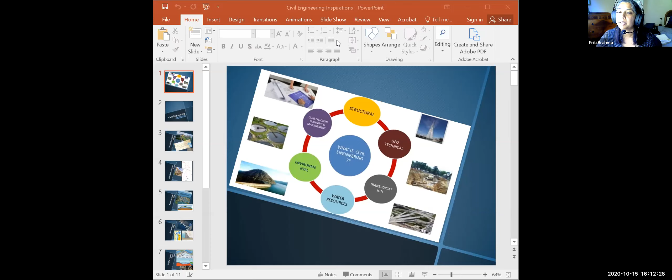I also posted 6 short videos for you to watch that go into individual people working in each of these specialties of civil engineering. I think you can get a lot out of that because some of them are students, some are young professionals, and they can give you more insight into what they do on a day-to-day basis in each of these 6 subdisciplines of civil engineering.

So rather than rehash what civil engineering is, I thought instead we'd look at some great civil engineering projects - some you may be familiar with and some not - and talk a little about some of the things related to these projects.

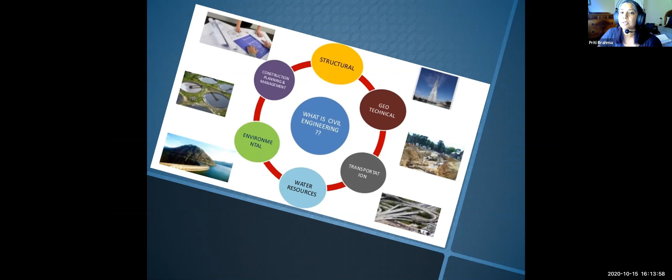We all know civil engineers design, build, and maintain basically the foundation for our modern society - roads, bridges, drinking water, energy systems, seaports and airports, transportation and infrastructure for all these systems, as well as keeping the environment clean. So that's just a brief overview, and please watch the 6 videos - in fact, the follow-up on this is to reflect on the videos, so you will need to watch them.

Civil engineers have the American Society of Civil Engineers - some of you may have come across this in the homework assignments we've done so far. The American Society of Civil Engineers celebrates a lot of creativity and innovation in civil engineering by showcasing projects that have taken place all over the world through their Civil Engineering Landmarks program, and these projects are at least 50 years old.

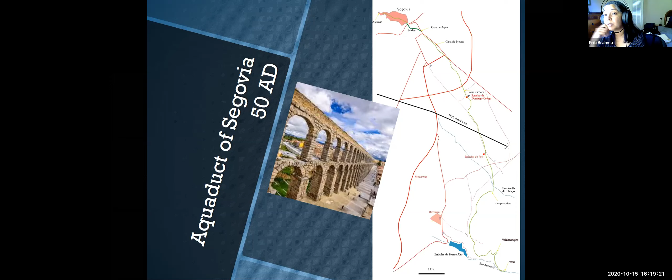There are 167 arches more than 29 feet high, and in many places along it you see the double arch configuration shown here. This was named one of those historic civil engineering landmarks in 1999. The whole idea was it transported water from the river to the city, and believe it or not, it's so well preserved that it's still doing that function today. Pretty amazing.

All right, the Panama Canal. Now we're jumping way ahead, thousands of years, to the Panama Canal in 1914. We're all familiar with this, but do we really know how it works? It's really an amazing system. It's 47 miles long, the width of that isthmus in Central America, and it connects the Atlantic and Pacific Oceans. It reduced what was a trip around Cape Horn by 9,000 miles, going all the way around South America. More than 15,000 ships go through here every year.

What else can I tell you? It needed more than 60 million pounds of dynamite and 40,000 workers to dig and build it, and they moved enough dirt to bury all of Manhattan 12 feet deep.

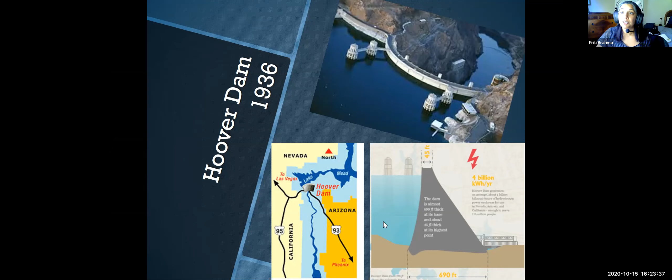In the times of COVID it's probably not happening, but in normal days you can actually tour this site. I think the tour is free, or it costs like $2 or $5. If you're in the area, it would be really great to visit, especially if you're interested in civil engineering or any type of energy engineering, hydropower, anything like that.

This one was made more recently, in 1994. I was just trying to do some math to see if most of you were alive when this was built. I was, so I remember it, but I don't know if it's in your early years if you recall hearing about the English Channel Tunnel, also called the Chunnel, which was made in 1994.

It is a tunnel that runs under the English Channel, and it happens to be 31 miles long and up to 250 feet deep. It connects England and France. It's actually the second longest tunnel in the world and contains the longest undersea portion of any tunnel in the world.

What's interesting about it is high-speed trains run through it like you see here, and these high-speed trains move so fast that there are valves in the tunnel walls that open and close to vent the pressure that builds up as the trains push through the tunnel.

It actually took 6 years and 13,000 engineers, construction workers, and technicians, and 11 boring machines to build. I've got a photo right here of a boring machine as it's making the tunnel. This is what the inside of the tunnel looks like today, and this is kind of how it runs under the seabed.

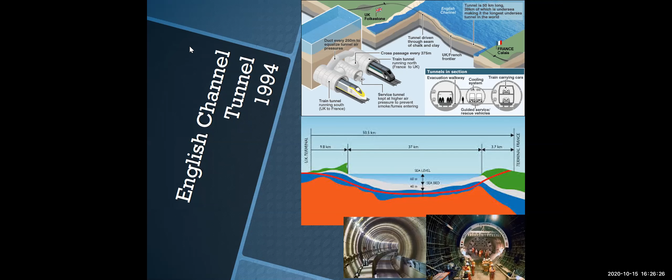Weren't we supposed to have high-speed trains here in California at one point? The ones they were talking about for California were above ground. But yes, there was a lot of talk of a high-speed train between San Francisco and Los Angeles, and there's been a lot of talk of a high-speed train also on the East Coast between Washington, D.C. and New York. I don't know right now. Does anyone know about the status of either of those?

Yeah, I haven't heard about it recently, but those are both great civil engineering projects that are in the future, and they're not the only ones. There are high-speed trains being developed all over the world. I think Japan has already got one, China might be putting one in, and I know there's the TGV in France that runs north to south. So lots of opportunities to work on a project like that after you graduate with a civil engineering degree in the next several years.

Okay, let's see, I only have a few more slides.

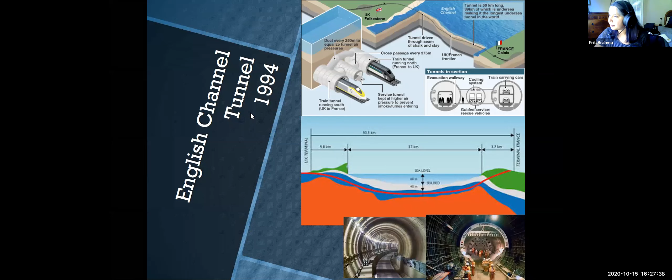All right, so I think I mentioned this tower before. This is the Burj Khalifa Tower in the United Arab Emirates. When we first talked about civil engineering, I don't think I talked about a lot of the specifics of it, other than it happens to be the world's tallest skyscraper, at a height of 2,717 feet - almost a full 1,000 feet higher than the One World Trade Center in New York.

Just to give you an idea, down here I show some comparisons of other really tall buildings you may be familiar with, so you can see how tall this really is. Anyone know how many floors there are in 2,717 feet? Any guesses?

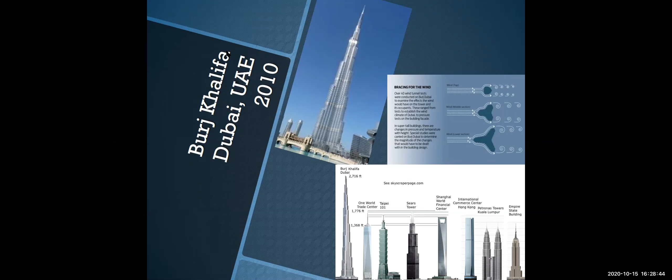One of the books I have with me right now is a Guinness Book of World Records that actually has this in it, and I think it's 163. It is, you're right - it is 163 floors.

Can you imagine riding that elevator? It's probably not one elevator that goes all the way to the top. In fact, I think I've been in the Empire State Building, and it was more than one elevator bank that you take - you take different ones to get to the top. But it's kind of scary to think that you're standing up there. There's 27 terraces on this building, so you can make your way outside and take a look down. It is the tallest freestanding structure in the world.

Now, what's most interesting about it is the way it was tested for withstanding the winds. Strong winds are actually a big problem in this area of the world, so they had to do 40 wind tunnel tests to determine the wind's impact on the building and also on the construction cranes that would build the building. They built it so it can withstand winds of up to 99 miles an hour.

So this is a problem with all super tall buildings, but they had to do 40 tests to get it right. It took 22 million hours to build, and some of it was done at night to avoid the high temperatures during the day. So really an amazing building.

Has anyone been here? Not me. Yeah, not me either. Interesting. Okay, cool.

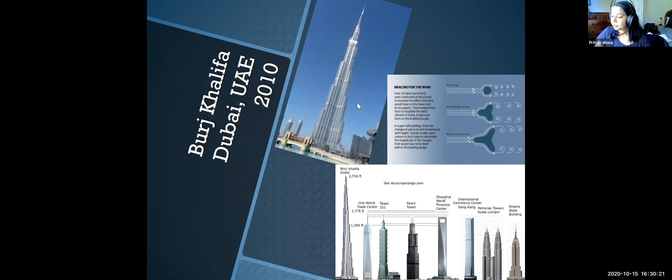We do have a lot of field trips to do after COVID, and wouldn't it be great if we did a whirlwind world tour of all of these sites and all the other ones? That would be so amazing.

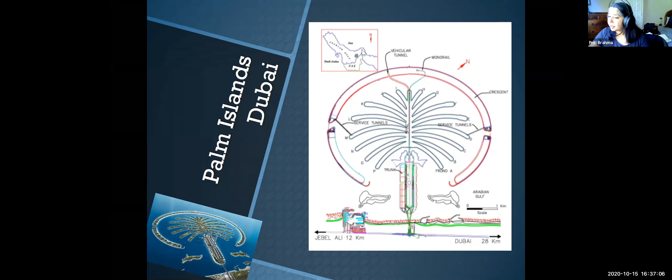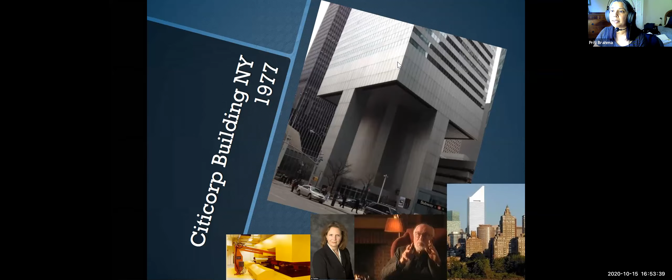Cool, well, hello everyone. So I went to Cabrillo, and at my time there I just dove into whatever I could get involved with, really trying to get some engineering experience, have college experiences, and more importantly, to network. Where I've gotten to now has been mainly because of my networking and being able to connect with different people. I transferred to San Jose State, and while there I was part of their engineering abroad program as well, so I did that.

Career-wise, while at Cabrillo I was working at the Monterey One wastewater treatment plant in Marina. When I transferred to San Jose State, I was working for the County of Santa Cruz in Public Works under road design. I also had second jobs to make ends meet. And now I'm in Davis, just living my life.

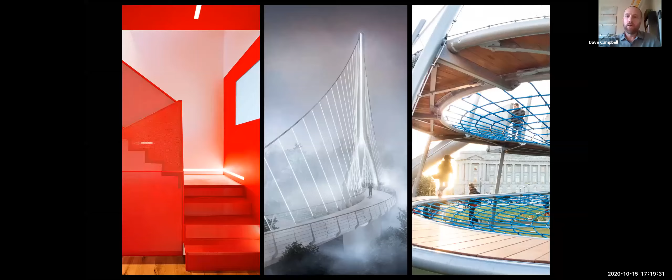As Priti mentioned, I took a very circuitous path to where I'm at now. I started as an art student, did engineering at Cabrillo, ended up transferring to Cal Poly, and then worked as a structural designer and also in structural forensics for a couple of years. Then I went back and did my graduate degree in architecture. Now I'm a project manager at a firm that does integrated structures and architecture. We don't just do both separately - we take on projects where we can express both elements simultaneously. So for the next couple of minutes I'll try to explain what that means, how you can merge these things, in the context of some of the work I've done.

So to begin, if I can get my PowerPoint back - let's see, there we go.

This may not look like the masterwork of architecture here, but how many of you guys have eaten pizza? And the question is, how do we eat pizza? Some of you have eaten pizza, that's great. You don't just grab it at the back of the crust and let it droop down your hand - you fold it, like a little bit of a taco, especially if it's thin, New York style pizza. You're actually using a structural principle there - a principle of virtual work, or virtual depth rather. So the pizza is acting as if it's really thick at the back end, where we folded it a little bit. We use the same properties for paper airplanes. The idea is that through geometry, rather than strength of materials, we can establish interesting form and behavior.

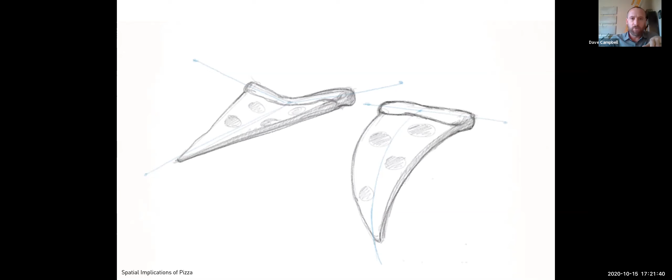So we applied this directly in this house that I did with Fougeron Architecture in San Francisco, applying it to this stair. If you're familiar with San Francisco Victorians, they're really narrow and really deep - long, deep, tall houses. Our main goal was to bring a lot of light and air into the space, but we still needed a staircase, which takes up a lot of room. So the goal was to use folded plates - the same principle as folding pizza or a paper airplane - to use perforated steel, about 1/8 inch perforated steel, which is really, really weak. But by folding it, we gain a lot of structural stiffness.

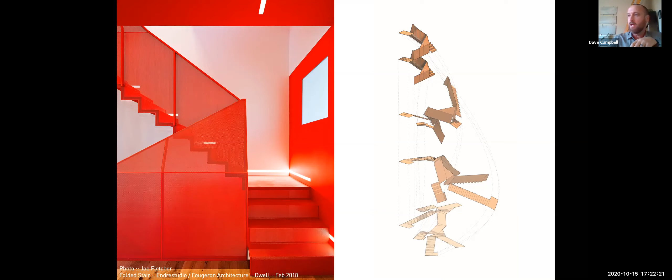And we create not only a space that's expressive, but also that allows light to penetrate deep into the house. So this idea of integrating a basic structural principle into a spatial quality is something that's really fundamental to my work.

This is a bridge we have in Ohio that just opened right before everything got shut down for COVID, just in March. We were just about to fly out there for our grand opening of this bridge, and everything got shut down. So I actually haven't seen this finished yet, which is too bad.

But what that does is create thrust, sort of like a roof of a house—it wants to push the walls out. So what we did was we actually tied the bridge deck. We tied the tower back together with the bridge deck, so we resolved the thrust internally.

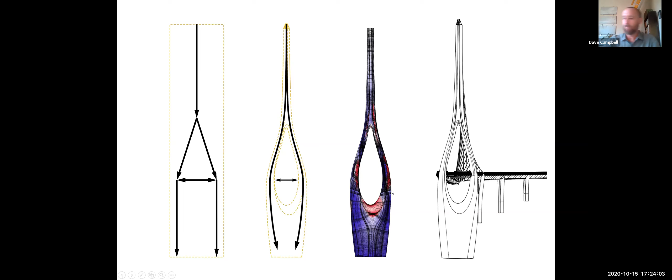With these projects, we have a really heavy use of digital design, a lot of integration between modeling and engineering, modeling and architecture. The reason this is so important is, as you're thinking about how you proceed in your careers or education, what kind of tools do you need in that toolkit? To be a successful engineer, you don't necessarily have to be able to do sophisticated 3D modeling, but it certainly helps—it opens up a whole other avenue of form that you can experiment with.

So for my practice, we integrate really heavily with our digital models. We have a very complete 3-dimensional model. The diagram here on the right shows how that model is built up.

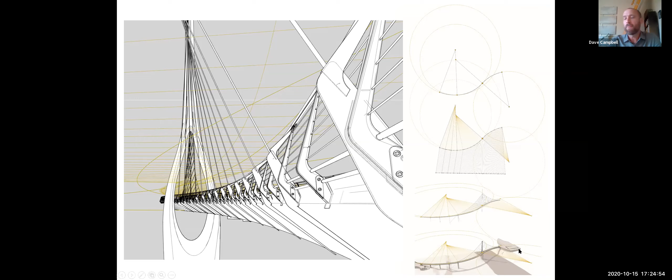That model is integrated directly with our structural analysis software, so that way we can visualize the architecture 3-dimensionally before we build it, which helps us raise the money we need in order to actually build these things. We can use that same model to also do the structural analysis to figure out construction details and so on.

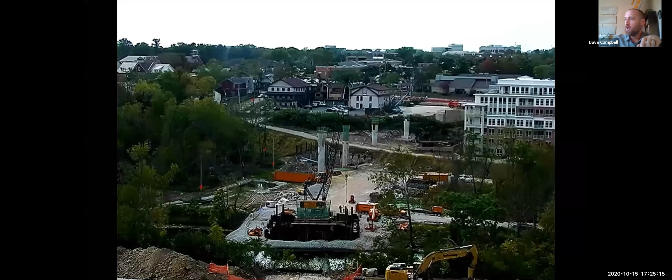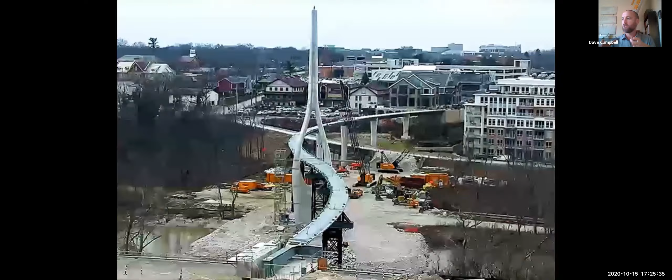So this is a time lapse of the construction of the bridge. One of the things I really loved about this project is the tower itself is a very complicated form. What they used was actually these press molds that they use for highway bridges, but instead of just using the standard AASHTO shapes, they actually milled CNC blocks within there. So they were able to get very close to our original design intent of this very complicated structure.

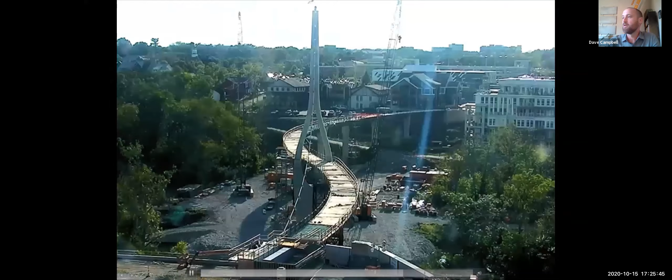Here you can see they've got the cables all in place and wrapped it up. The total construction time ended up being close to 3 years—it should have been about 2.

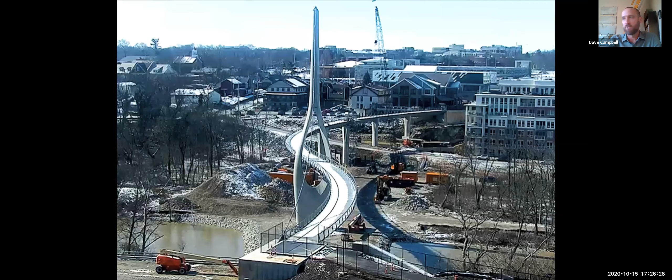But the lead time for the cables—this is probably not super relevant for this class—the cables are a specialized thing, and just because of construction scheduling, we had the site essentially laid down for 8 or 9 months. That's another thing that's really important when you're designing: to think through what's the critical path, what are the things that have to go in place and in sequence in order to get something done on time, because it's very expensive to shut a site down for several months with nothing happening.

And then there's the completed bridge, open for people to go out and be responsible, but still get out into some public space. One of the things that's kind of fun about this project is it's become a place where people do wedding proposals—on Instagram we see a lot of photos of people doing their photos for their engagements, which is pretty fun.

It's in Ohio is the question, but I have a question for you.

So were you also involved in the process to put the bid for this together? How did that part of this process happen, where a firm in Emeryville is building something in Ohio?

Yeah, so we also have an office in Chicago, and that's part of it, that we have sort of a national presence. The other piece is that we have a reputation for this type of design, so we get brought in, or we do a lot of competitions. This is actually a competition we won, and then went all the way through the design process. But since we're pretty small, when it comes to the actual delivery of the project, we almost always bring in another partner, either a local firm, or a firm that has a local office.

So in this case, T.Y. Lin was the company, which is a huge international firm, and they're what's called the engineer of record. We're the design engineer and the architect of record. They're the engineer of record, so they take responsibility for the final structural engineering, and for walking the site and making sure the rebar is being placed properly and everything else.

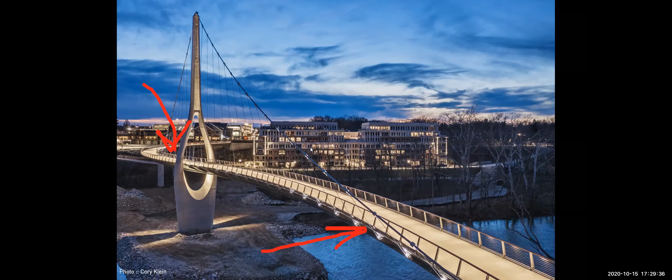I'm just curious how it works, like how there's the cantilever support on this side, but not this side. Yeah, so the other side it's opposite. It's really cool. Is it due to the curvature? But how does that work?

Yeah, so this is a great question, Clayton. I think that was Clayton drawing, maybe, is what it was said. Yeah, so...

Basically this is a very unique structure. This is the only reverse S single suspension bridge in the world. What ends up happening is it looks like it's cantilevered out on the back end, but it's not. It is connected, but it's a slip connection, so it's able to move freely. So that curvature, without getting too deep into the technical aspects, is balanced by the single-sided supported cables. Basically the bridge is curved, it wants to sort of tip down toward the river. Let me pull up my drawing tools here so I can not just gesture at you.

So the curved bridge wants to tip, and this one wants to tip the opposite direction. Oh, so it's balanced. Yeah, and the cables also change their angle depending on where they're at. What they do is hit these little plates, which push them right through the virtual shear center of the section, which means that as this thing wants to twist, it's basically being supported through its virtual centroid. We do that through the bridge cross section, deck cross section, this box girder that's down below.

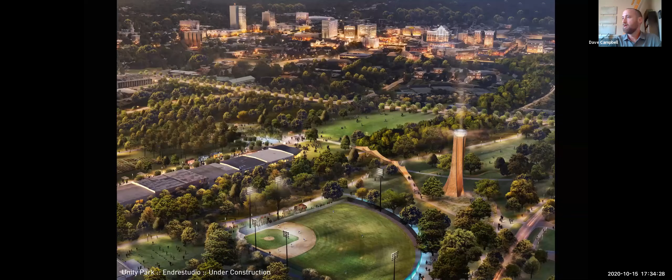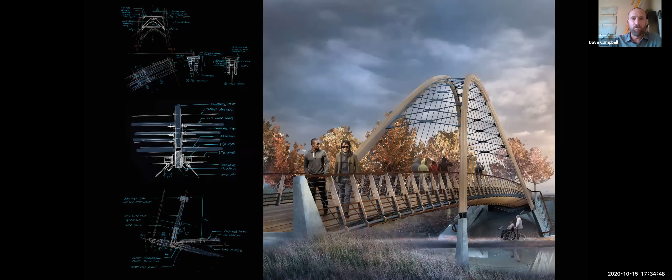What's nice about being able to hand draw is you can not only work out your structural system, doing your calculations of how big the plate needs to be at a given spot, how you're transferring forces across a particular node, but also what is the sort of presence of that detail—how's it going to feel, what is it going to look like while you're there.

When you're doing engineering, to be an engineer that everyone wants to work with, engaging in the process is so important—not just treating it like it's a problem to be solved and then you're done, but rather being committed to whatever the vision is for that particular project.

Priti, who you'll hear from in just a second, just put a little bee in my ear. The other thing worth knowing is there are a couple of programs in the country that are architectural engineering programs. The first one is at Cal Poly, and it's an excellent program—it's housed within the College of Architecture rather than the College of Engineering. If I had known more about it before I went down to Cal Poly, I probably would have gone that direction, because you get more structural engineering experience, and you also get some architecture studios to understand how buildings are being designed, and how you as an engineer will integrate that process.

The trade-off is you have fewer classes like water resources, environmental engineering, and transportation engineering—all the other things that make up a civil engineering degree. You're taking those classes and doing additional structures classes and classes in architecture. If you're interested in this type of thing, I highly recommend checking out architectural engineering. Kansas State also has a really good architectural engineering program, and there are a handful of others throughout the country.

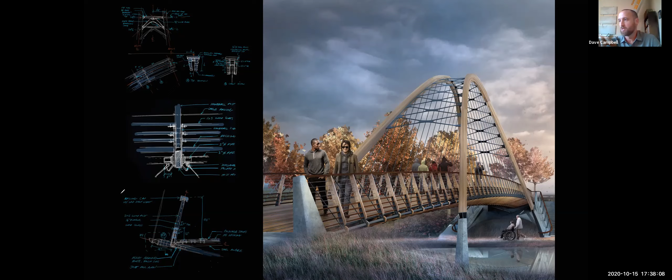We use Rhino really heavily, and we'll interface with Revit with our designer of record, architect or engineer of record. Then from there we'll use a couple of different rendering engines. This one was done in V-Ray, and then a whole lot of Photoshop on top of this. So this is where the art comes back in, being able to integrate entourage, the people walking across here, and the trees, to get a particular mood for that image.

The hand sketching stuff, I do in notebooks. I've got like four open on my desk right now. I also do a lot of work on my iPad, which lets me send sketches to my drafting team and other engineers within the company very quickly, because I don't have to scan it or take a photo and email it, I can just send the digital copy. So the iPad is really good for that.

And then in terms of analysis, we use a couple of different tools. There's a tool, a very industry standard tool, called RISA, which is great for structural analysis for buildings, but it doesn't handle complex form particularly well. So we also use a program called Karamba, which integrates directly with Rhino. Let me flip over to another project real quick.

And did you learn those programs on the job or through your schoolwork?

Yeah, so Rhino I learned in grad school. This image is taken from the finite element modeler, which is Karamba that I referenced. I learned this a little bit in grad school, and then really figured out how to use it professionally on the job. This became more directly part of my workflow with Ender Studio.

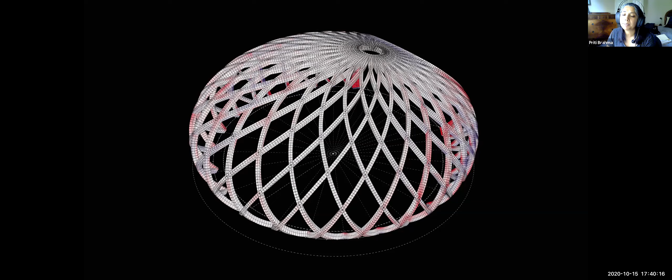Wow, so those are skills you're looking for particularly. Absolutely. And someone was asking if there are classes on those programs, and another person was asking if there are apps they can buy. Maybe if you have a link to some of them you could put in the chat, that might be interesting. Yeah, let me jot it down real quick, and then I'll throw some comments in the chat as well.

Yeah, so the classes, definitely you can take classes. These days, if you want to learn how to do anything, YouTube is really your best friend. You don't need to take a class in CAD or in a modeler. There are things you get by going through an AutoCAD class, a Revit class, or a Rhino class, but in many cases you can pick these things up as you go. Most of you in this class are probably pretty digitally savvy, even if you don't think of yourselves that way, you can pick up software really quickly. So if you didn't have any modeling experience, that wouldn't necessarily be a deal breaker, we would just have to consider how you can integrate immediately.

It's something worth paying attention to, even in engineering: not only understanding how you do analysis and work with analysis programs, but also how you just model. How do you make complex geometry? It can become very important.

This image shows stress areas in red. This is a house I'm doing down in Big Sur. I'm closing with this one because it's an integration, and our role is all the way through the project, from inception to the end of construction, and it's all digitally integrated. This is the plugin Karamba, a finite element modeler, which shows stress. You're seeing tension and compression in these individual units for this very complicated urchin-shaped house.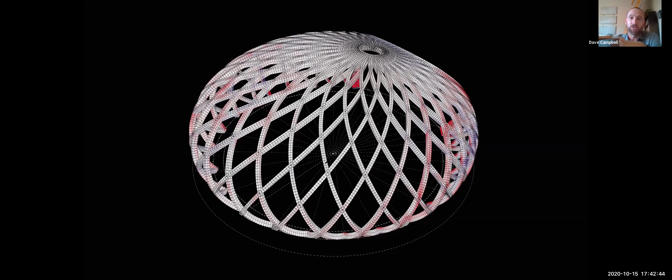The challenge is that the model itself is not where you can end. This is where your engineering coursework about codes comes in. If you get into civil or structural engineering, you start learning about concrete and steel and how it's actually codified, which is a bit different than how you analyze something. Then you get into things like interaction diagrams, which tell us what a given reinforced concrete section will take, because a reinforced concrete section is both concrete and steel.

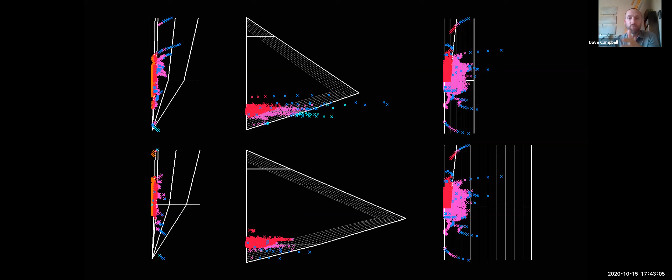We move from that, and this gets pretty computationally heavy, so coding classes are also useful for engineers. It's good to understand at least the basics of how scripts and code are written. We take that stress information and literally translate it into a heat map of whether a given reinforced section is overstressed or not.

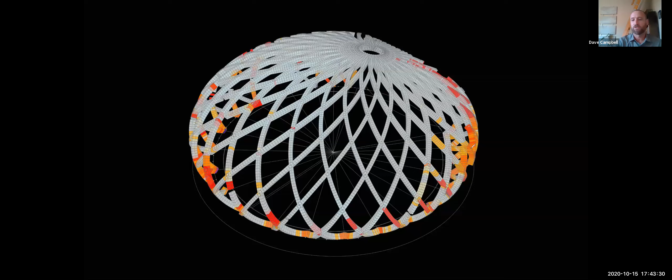That moves into a smoothed version, through an optimization process where we're smoothing this into a very limited number of concrete sections, because we don't want 30 different types for the contractors to deal with. I'll just blow through these quickly.

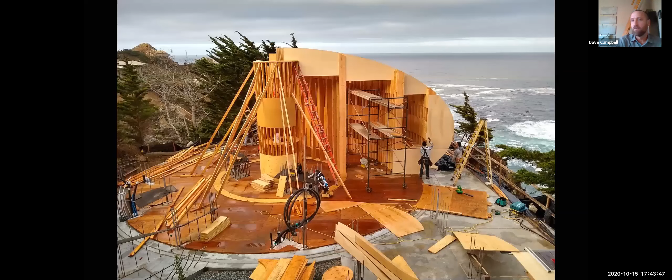The interesting thing is that it's a concrete building, so we have to have formwork, and that formwork is also too complicated to just hand somebody a set of plans and say build this. Every part's geometry is unique and super complex. With a reinforced concrete project, the joke is you have to build the building three times: once out of wood for the formwork, once out of steel for the reinforcing, and then the third time in concrete itself.

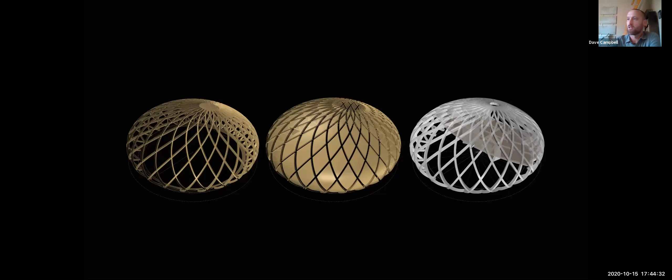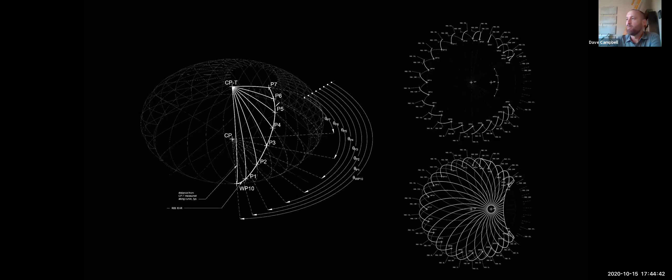Here the interior formwork of the dome is going up. This is the digital system of every piece of the mold we're designing, so we're heavily integrated all the way through the construction process. Every part is labeled and CNC milled, then shipped to site, and we give them information on how to place those individual elements. Here we've got the interior formwork of the dome, and then our reinforcing steel.

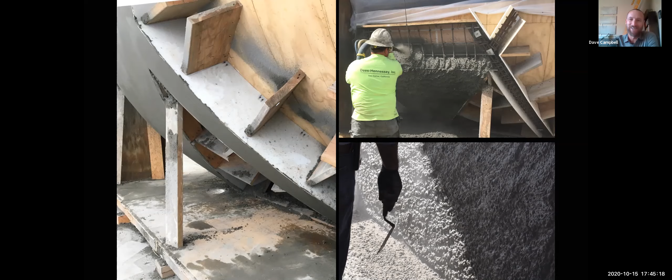This is maybe just interesting, I'll throw this in quickly at the end. This is a prototype of that wall section. When you do something really complicated, building departments often say we have no way of assessing this, so go ahead, but you have to prove to us through a physical mock-up that this will actually work. So this is us testing the construction methodology to see if we can actually build it. This is what it looked like a few months ago.

So who wants to live in a sea urchin? Who is this person?

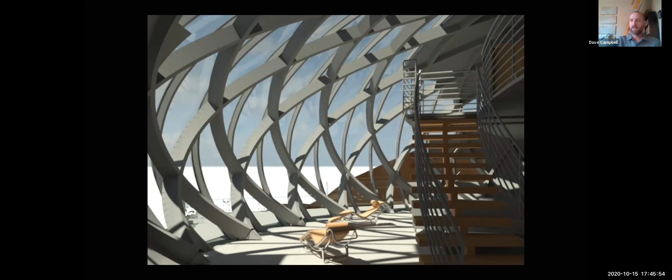And those are all windows, right? On the outside, yeah, everything is open on that side. The geometry is shifted so the openings are big on one side and small on the other, so we have the maximum views from this side. And the site is just spectacular, it's a remarkable place. But yeah, the client, she's a character.

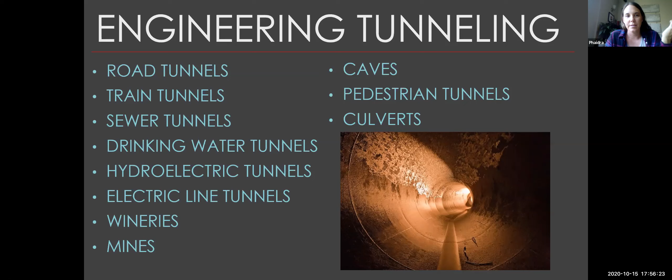The machinery and technology has gotten so good that there's so much that we would never know in a lot of ways. There were some projects, I think it was in LA, where they were trying to put subways in and then the ground was sinking and stuff. It doesn't always go so smoothly, right?

No, it doesn't. Are you talking about the Purple Line in LA Metro? Yeah. So the big thing about tunnels is it's solely dependent on the soils, right? How you're excavating and the soils that you're in.

For instance, like this photo on the bottom right, you see this really large water cavern. This is in Chile, and that's rock. Rock is really sound and really stout, so the big buildings above it can withstand some of that stress because the ground's not moving underneath you.

And soft ground is the worst. So soft ground and water is the worst for tunnels, it's horrible. And LA has a problem with the tar pits, the tar sands.

I'm actually working on the LA Purple Line project. I wish I had a photo, but you can't take a camera down there because it has so much sulfur in it from the tar sands that it could explode.

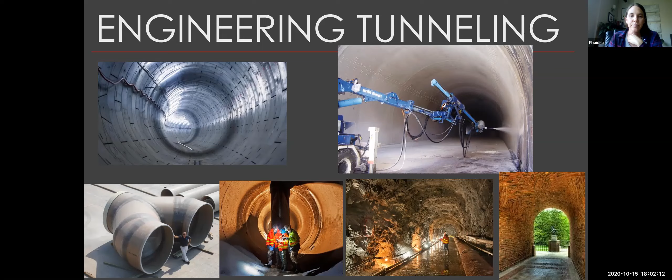So just going over three quick ways of excavating a hole in the ground. One of them is blasting, and it's one of my favorites because it's so unique and different, and you don't get to hold dynamite very many times in your life. You have to make sure you're doing it safely.

I think the question students might have here is, do you get to do this hands-on yourself? I have many times, especially early in my career, I've been doing this for about 15 years now. Early on, I was allowed to fill the holes and actually set off charges, multiple charges. I think it depends on who you work for. If you work for a contractor as an engineer, you'd be able to design and fill the holes and set off charges, but as an engineer for the owner, you really wouldn't be allowed to. I knew someone working here though, so they let me do it.

There's really nothing like setting off a charge. I have a couple of videos I wanted to show. It's pretty exhilarating. This is just like a trim shot.

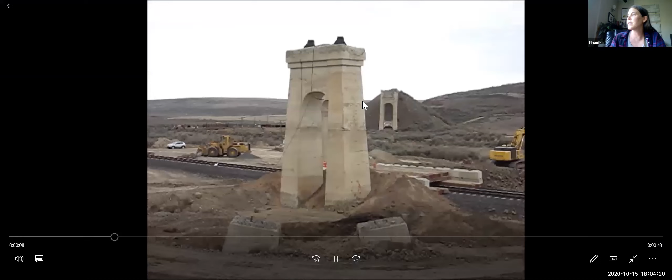It doesn't seem like a lot, right? That seems like just a trim shot, real small. But the reason it goes off at different times is because in blasting you want to give a free face to the blast. This is actually not in a tunnel, but we did a lot of blasting. This is a bridge pier along a railroad track, and there was a tunnel further down, so we couldn't interrupt train service. When we had to get rid of this bridge pier, it had to fall on the opposite side of the tracks. So you design the blast so that, in slow motion, the bridge pier falls in the opposite direction of the tracks. It's hard to get videos of blasting in a tunnel because you're not supposed to be close to it, but in this scenario it's much easier to get blasting videos when you're outside. That is so cool. It is pretty fun, I'm not gonna lie, it's really a blast.

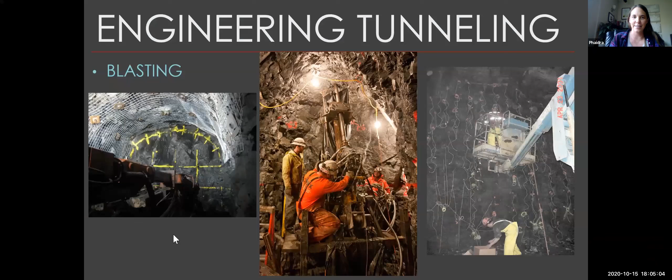Okay, the other one is a roadheader. You know that movie Total Recall? This is very Total Recall-ish, very futuristic, but it's very effective. Some of the issues with this is you can only do it in certain ground types. It can be very messy, really dusty, so a lot of them put a water spigot on the edge to spray down whatever you're excavating. But usually this is good in soft rock conditions. This is also really common in wineries because the machines are a lot cheaper than a tunnel boring machine, and a lot of places won't let you blast within city limits, even though blasting can be controlled. So using something like this would be good.

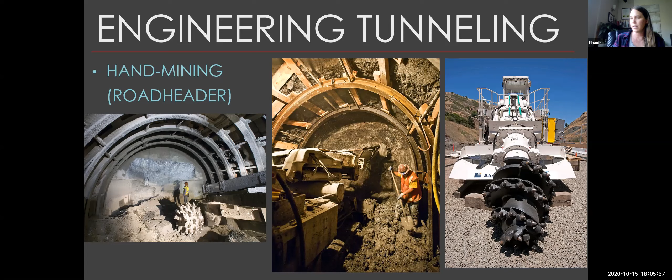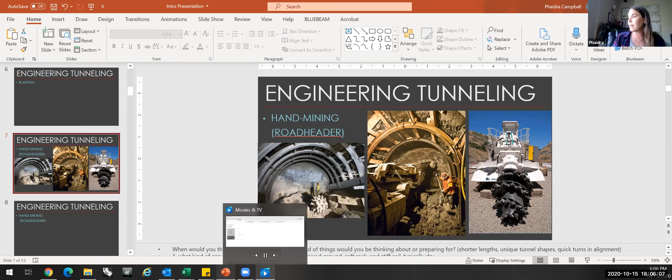I have a video of it. Does one take longer than the other? I mean, this looks small, so it'd take a long time. Well, it does take a little bit longer, but not very, it depends on the ground entirely, and how fast you are at putting up ground support behind it. So it's pretty dirty and loud, pretty messy.

You have to be able to withstand some of that, so it's not always the best way of excavating. But this is kind of the cream of the crop, one of the most common things you'll see on the news, especially now with companies like the Boring Company who have a lot of marketing techniques.

These are tunnel boring machines. This is where mechanical engineering and electrical engineering really shine, and it definitely incorporates a lot of different types of engineering. One company I'll put in the chat is called Herrenknecht, a German company. There are about 3 different tunnel boring machine companies in Germany, 1 in France, 2 in China, 2 in Japan, and 1 in the United States, plus maybe a couple more sprinkled around, but those are the main ones.

Herrenknecht, I think, has the best videos on their website. Basically what it does is it almost acts like a worm, I guess you could say, with a spindle on a head. The head rotates, and there are disc cutters on the end of the head that score the ground in front of it. As it scores, the ground falls to the bottom and is brought up through a screw conveyor, kind of like a Da Vinci design. Didn't Da Vinci design a screw conveyor?

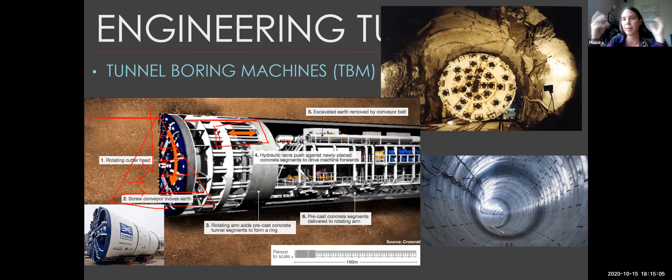Right now it's actually risk with COVID, because people are working in close proximity to one another, and we've had some pretty horrible COVID issues on our sites, especially in LA. And then also working in these tight spaces with the city's structures up above you—there's a lot of risks. And then you always get the lawsuit. There's always a lawsuit with someone saying their doors don't close anymore, and a lot of times we're not even tunneling near their house. Communities hear about things, and it's very litigious. That's what makes this industry so expensive.

Wow. I don't think it's going to get much cheaper. There are new technologies coming out that will help, but at this point I think things are going to just be more expensive.

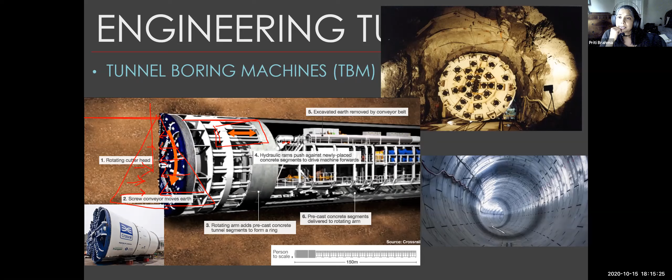So I'm just going to go through, I don't have a lot of time left. Oh, I don't have any time left. Can I go through just one quick project?

Yeah, sure. Okay, so I just wanted to talk about this, this industry is really diverse for what kind of engineering you want to go into.

What makes it really fun is there's never a tunnel where you live, very rarely, so you do have to travel. One of my coworkers who just got into the tunneling industry about 2 years ago was really confused by this - he said, I don't understand, I'm moving here, I'm moving there. And I was like, well, we go where the tunnel project is. The tunnel project never comes to us.

So if you're interested in travel, in seeing new places, this might be an industry you'd be interested in, because there's always a project in the middle of nowhere that needs a tunnel. And although Kaneohe in Oahu is not in the middle of nowhere, it's in this really amazing place in Hawaii. I got to spend quite a bit of time there doing both the design and the construction.

This is a water sewer tunnel that used a tunnel boring machine, done in rock and soil, mostly basalt, and it had this really beautiful bluish-green basalt and then coralline deposits - you could see coral layers. Geologically, it's fantastic. The length is about 4 miles.

It's a pretty small tunnel at 15 foot. It doesn't seem that small, but it actually is - when you get into those spaces, it's very small. It was round, up to 800 feet of rock above you, and it had 3 shafts.

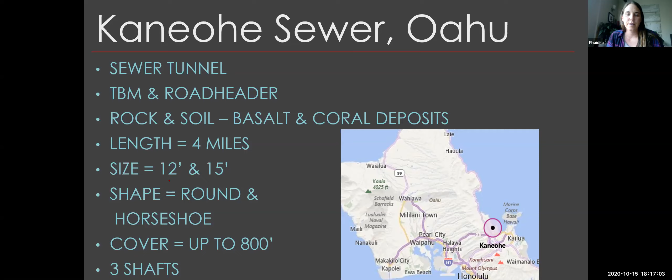So when I was talking about design, like Dave was talking about that planning - there's so much planning involved in this. There's drilling, there's rock cores that you're going to get. When you just drive around, you look at the hillsides and rock faces, and you can get so much information just by driving by and seeing a cut slope, because the joint patterns you see from the surface are going to be the same joint patterns down below.

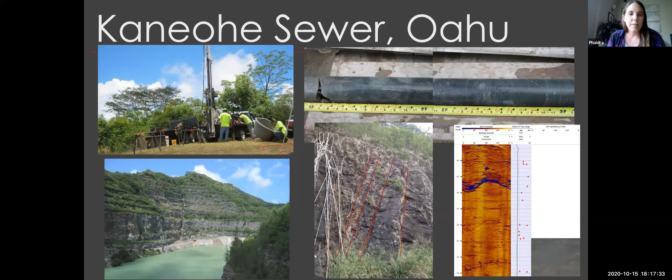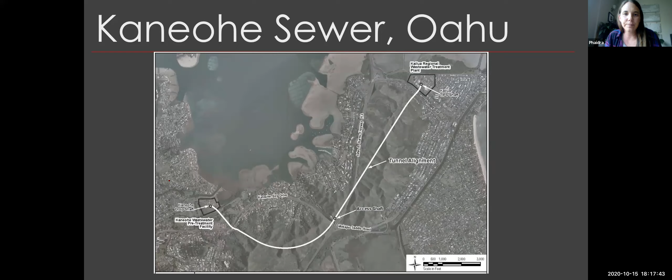So this is the tunnel alignment that we had. We had one shaft on the north side, one on the west side, one on the east side. It's between Kaneohe and Kailua, with a big mountain range in between them. So we used - there's the profile there. If that's a plan view, a bird's eye view looking down the tunnel alignment, this is a cross section through that, and you can see the 2 different shafts.

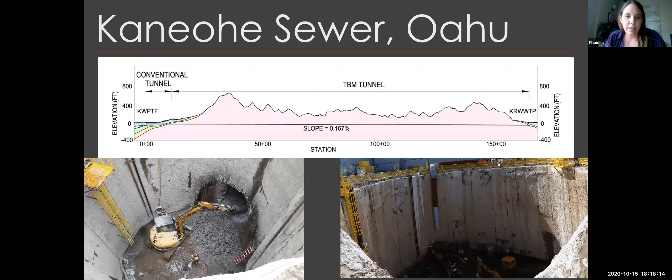One is on the right-hand side and one's on the left-hand side. These were built using slurry wall concrete construction - it's a pretty standard way of building these out of concrete and reinforcement. And that's the slurry wall machine there.

I was talking about the thrust, the rams that push against the back of the concrete segments - well, this is a different type of machine. This is a main beam machine in rock, where it doesn't have segments at all, so it just leaves rock exposed. Instead of rams that move against the back, it has little feet that push against the side of the rock and then move it forward. So it's like push and move forward. It was a pretty neat tunnel.

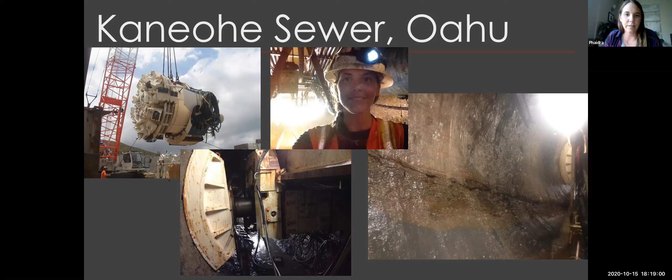I got to go to this great place and spend a lot of time. You do work long hours - I'd say like 14 hours a day. You make a lot of money very quickly, but during these jobs it's hard, you don't have a lot going on. You're pretty much on the job almost all the time. You do get breaks afterwards, of course, and whenever you get a break, you go out and try to explore as much as possible.

Someone asked if you ever get sick being down below in the tunnel. I've gotten sick - never drink water that comes out of rock in a tunnel, I'm just throwing that out there. That was the sickest I think I've ever been on a job site.

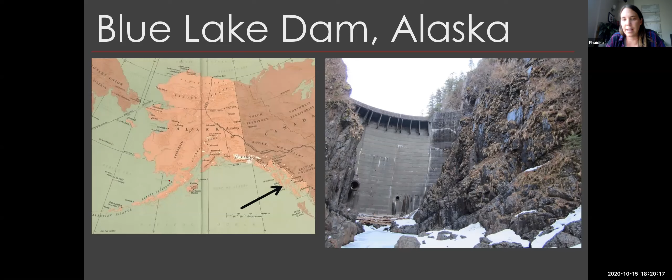Yeah, that was a mistake, so yes I have gotten sick. If you're sick, you try to get into work if you can, but you don't want to make others sick around you, so you really try to be cognizant of that, especially working in tight spaces. I've worked all over the US at this point - Alaska, Hawaii, right now DC, working in Alexandria, Seattle, Washington. I used to work on the railroad lines, all along the railroad tracks and railroad tunnels. So it's a very travel friendly profession.

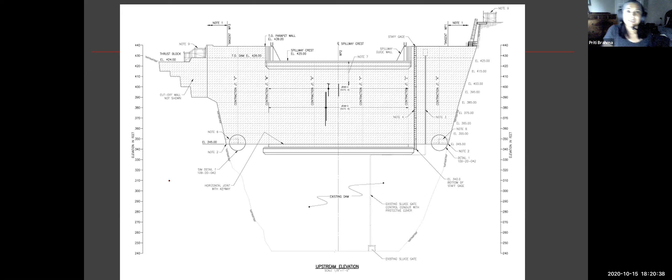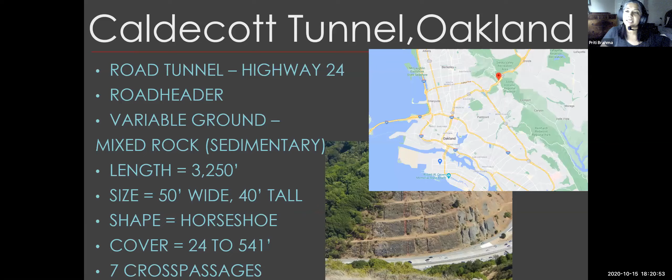Yeah, we kind of have to go, but you were going to tell us, because there were a lot of guesses on the earthquake and tunnels issue, and I think the majority of people said inside. Actually, I only have 4 or 5 - 6 people say inside, 1 person says outside, and 1 person qualifies inside as depending on what tunnel.

I would say the last one's probably the best answer, but it's actually safer to be inside a tunnel during an earthquake. So when someone tells you, when you're riding BART, 'oh I would hate to be in a tunnel during an earthquake,' they're wrong. You want to be in a tunnel in an earthquake because it's round, and when it's round, it actually moves with the whole ground. So you may not even know that you're in an earthquake. There's nothing that can fall on you inside of a tunnel, and more than likely you will not even know. Unless these are square culverts, that might be a little different, but in round tunnels, that is the best place to be - mostly because it's all in thrust, almost like the top of a doorway, all the way around, so it's very structurally sound. This is the best place to be.

If you guys have any questions, I know we're running late, but I can put my contact information and my LinkedIn. In terms of that LinkedIn question, I highly recommend getting a LinkedIn, especially after you get out of school.

Cool, thank you so much, Phaidra. This was great. Thank you to Priti too - it was great to have both of you on and to find you both not traveling right now. I'll see you in a couple weeks. So let's thank them both. This was really great hearing about all of this.